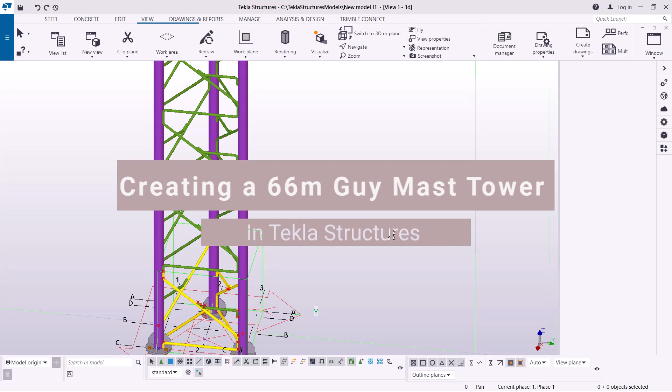Hello and welcome back. Today we want to create a guy mast tower over 66 meters high, something similar to this. Let me zoom out so you see how high it is, though it is extra with some 6 meters high. So this is where we are heading to.

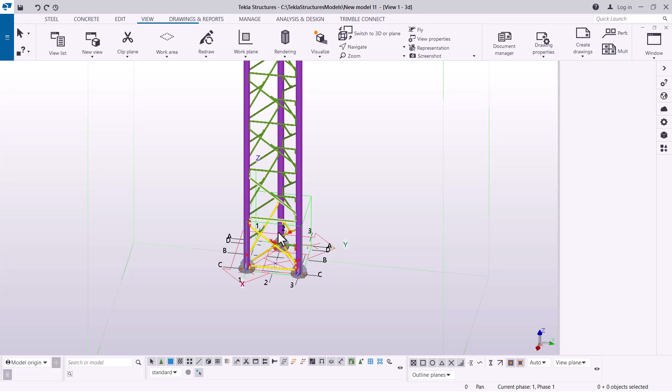If I bring this close, you can see we have this in place. Let me press Ctrl R and pick my rotation point so you can see that. So we want to create something simple as this.

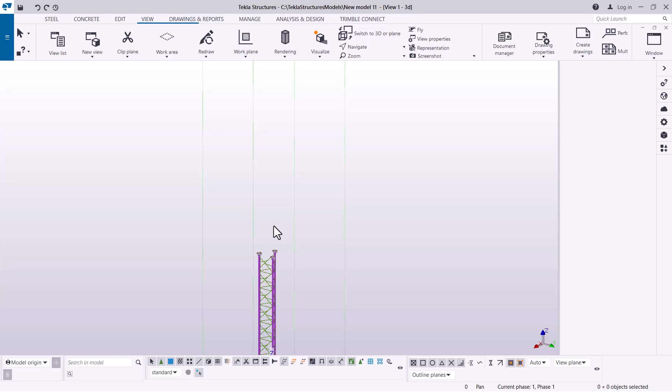First of all, let me delete everything and get started afresh. Let me select on that and press delete on my keyboard, and I'll select on that once again and delete that, and delete everything here. Let me first undo, because I want to see the specifications of the section.

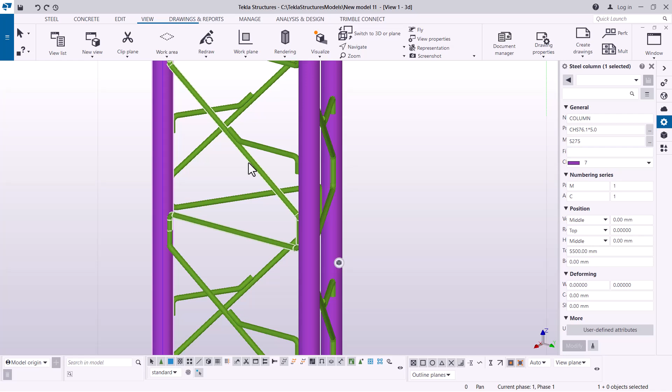The section we have, if I double click on that, you'll see I have CHS 76.1 by 5 mm thick, and we have the bracings. We have a D20. If I double click on that, you'll see we have a D20 here. So we will use this as bracings, welded on that leg, and that will be welded on this leg straight away.

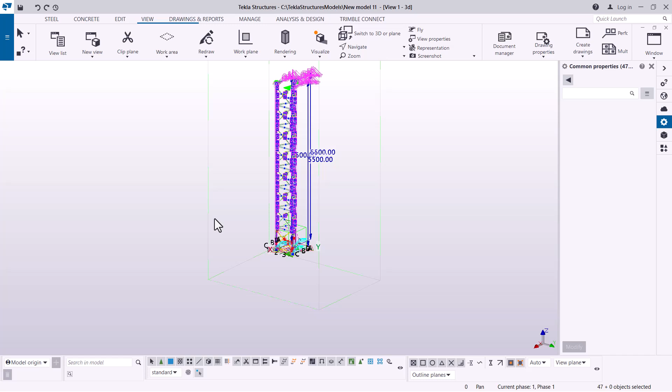Now let me get rid of this up to that spot and press my delete button on the keyboard, and delete whatever you don't want to see here. Let me get rid of all this, so that we get started from the start, or from scratch, as we call it.

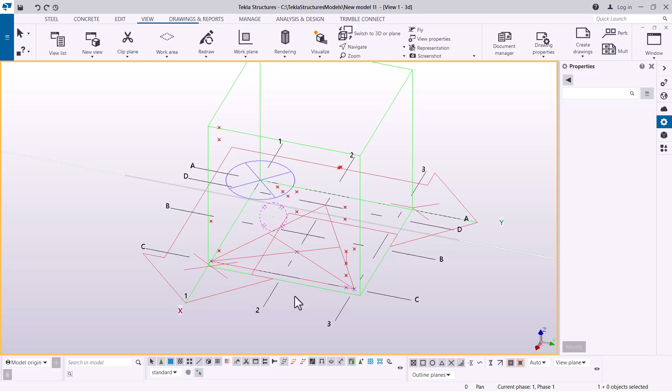Normally, the dimension of the two legs we have, from this center to this center, is 660, or 0.660. So you just create an angle. This is an angle of 60.

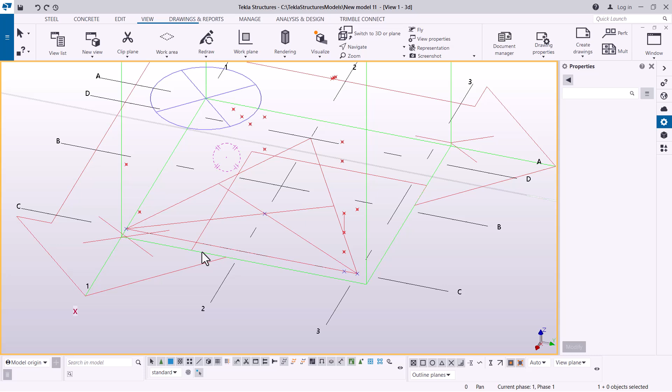Let me go straight and start placing the columns, the two legs. If I snap on that spot, you'll see I have my column in place, but this is not the right member we intend to use. So I'll double click on that, and I'll come to that button there, which takes me straight to the profile catalog.

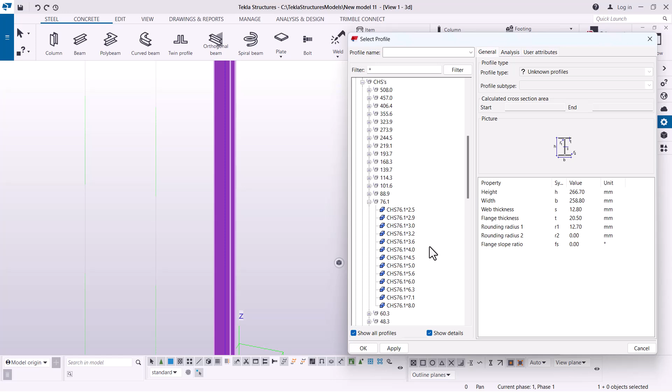From the profile catalog, I'll select the right catalog of my choice. I'll come here, scroll down and select any part here. Let me minimize this. Scrolling down, I'll come to circular hollow sections, then CHS, and pick 76 here because that is closer to the specified section. So we'll pick this one, 76.1*5.0. I'll click apply and give it an OK.

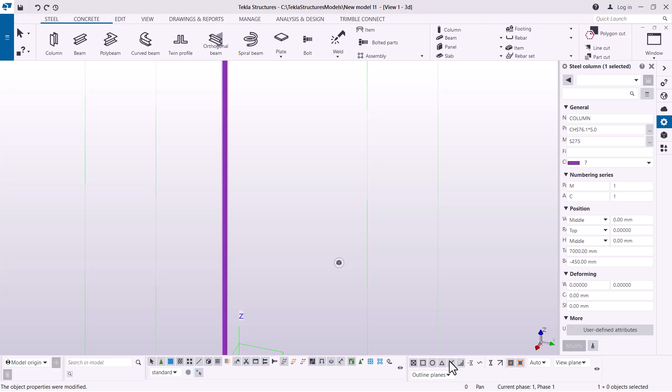Then I'll click apply. Once we have that, we have to change this dimension here. You can see a whole part has gone beyond 0 level.

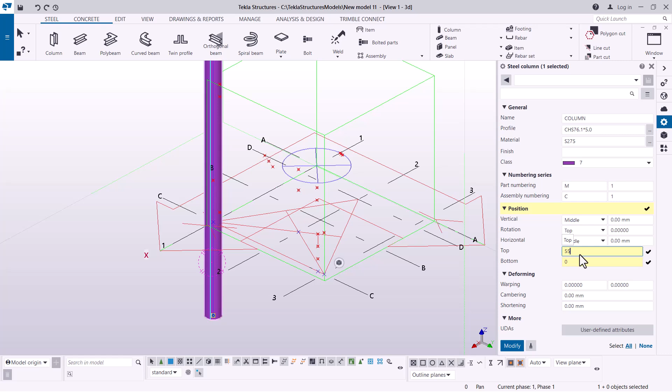So we have to rectify that to take it to 0 level. We have to double click on it and change that to 0. Every segment of the tower is divided into 5.5 meters, so let me key in 5500 right there and click modify.

So I have these in place, and since I have my positions already defined, it's not hectic. As I showed you on a different software, like Cosmos, defining these angles is the same thing. What I did: I created a line here, used this point as my rotation point to create an angle of 16, and came here on this side also to use this as my rotation point and create an angle of 16 degrees.

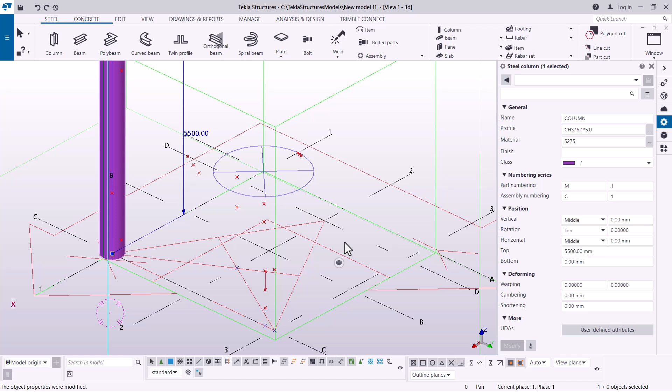Then from there, I managed to change my grid line to match the position of this side of the third leg. Now let me go ahead.

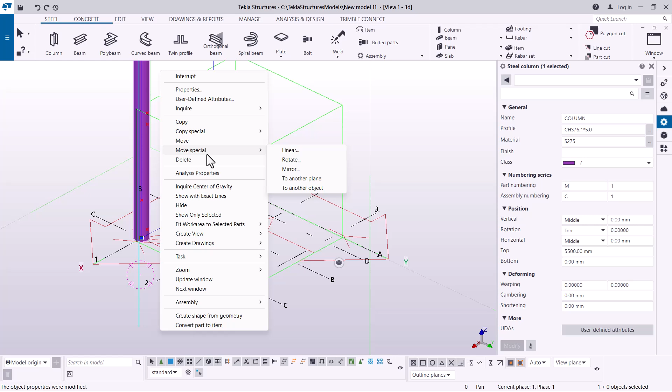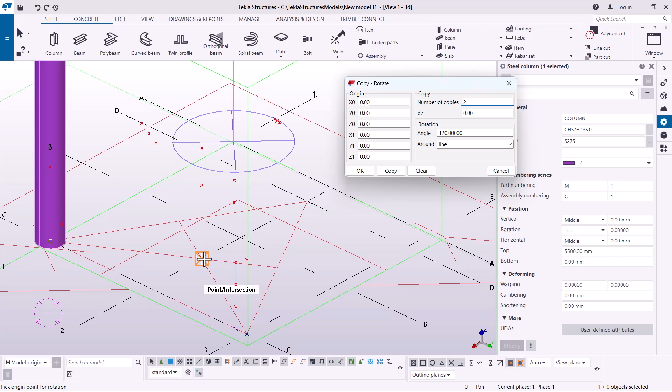Let me right click and come to copy special. Prior to that, let me come here and try to use rotate, using a line. So let me pick the line, and I want to rotate this by 120, and I need maybe 2 of these.

If I click copy, I want to use this center here as my rotation line, and I'll get the 3 points in exact location as I intended them to be. So you can see I have that in place, the 3 in place, by using the center here to copy. I've copied this about the center.

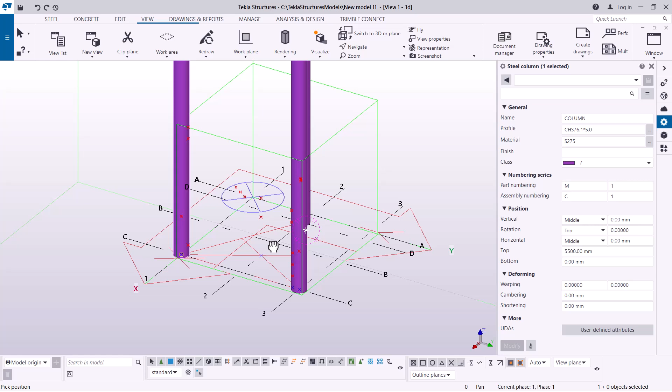Now I have my points already in place, because I want to start creating my rafter, I mean the braces. The braces, remember, we're using a round bar. So what I'm going to do is get started here.

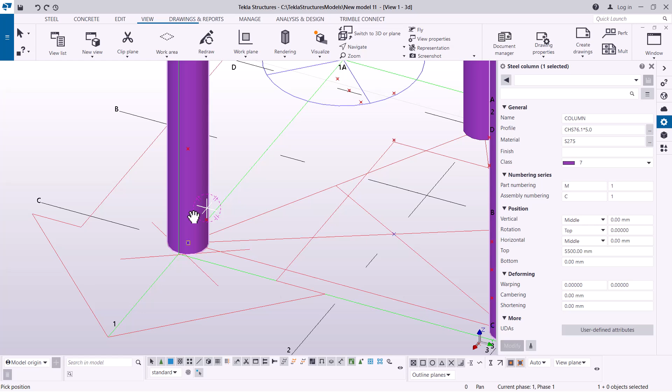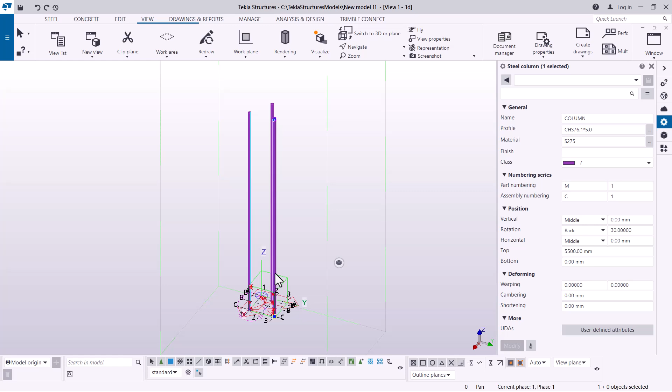This time around, I'm going to use a polybeam. And to use it, we are going to use a polybeam. Prior to that, let me just first confirm this is correct. This is 5.5.